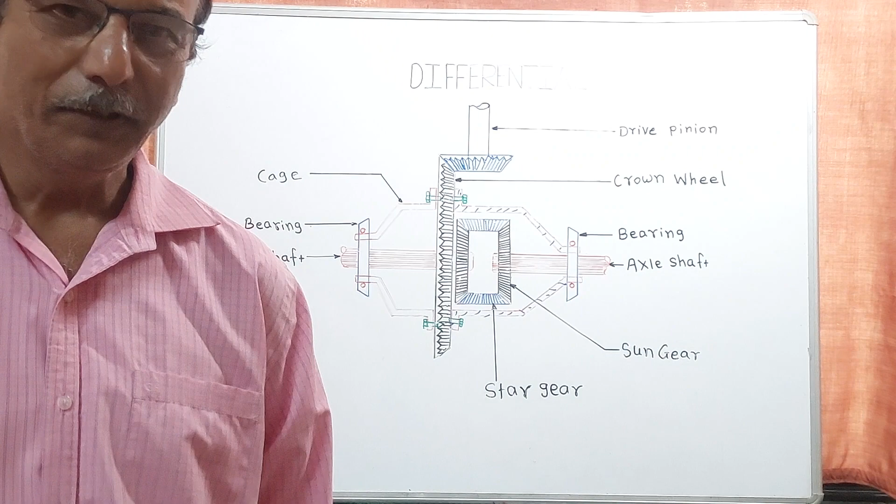So let us see, I have drawn the figure on the board. Name of the figure is the differential, that is our topic. This type of topic is used in automobile vehicles.

Why is it very important? If it is not there, then problem will occur at turning time. That's why there are two types of axles: one is the dead axle, the other is the live axle. Live axle is used in vehicles at the backside. Nowadays, majority in light vehicles, transaxle is fitted.

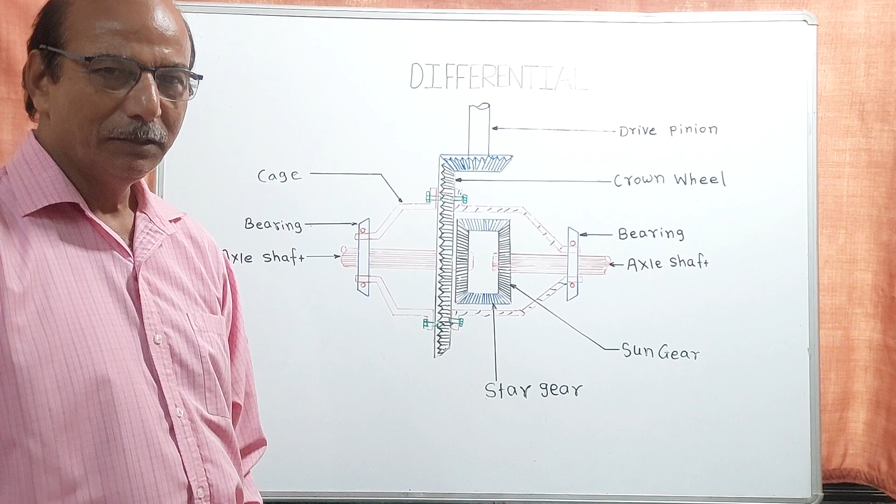So in light vehicles, transaxle is fitted. There is a clutch, gearbox, and differential, all included in one case, that is called a transaxle. These are fitted in light vehicles, as a front side unit. In heavy vehicles, nowadays maximum differential unit is fitted in the back side.

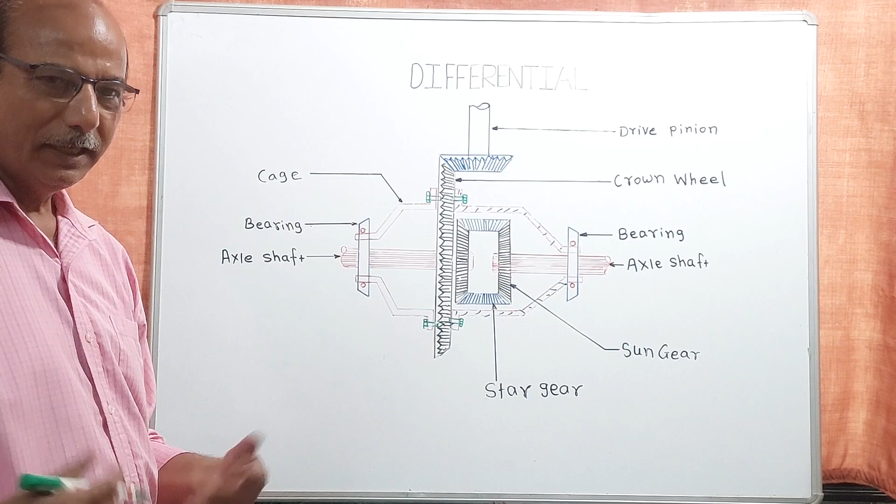So this is the location of the unit, as I have told you. Just by looking at this figure, we cannot understand this unit properly, so I will explain in detail. Just see here, both wheels are in the back side, this is the axle side, these are the tires and wheels. Between both wheels,

this differential unit is fitted inside the box. So why is it a requirement? Why is it necessary? That is the main fact, what is the use, what is the principle and function of the differential? That is the main thing.

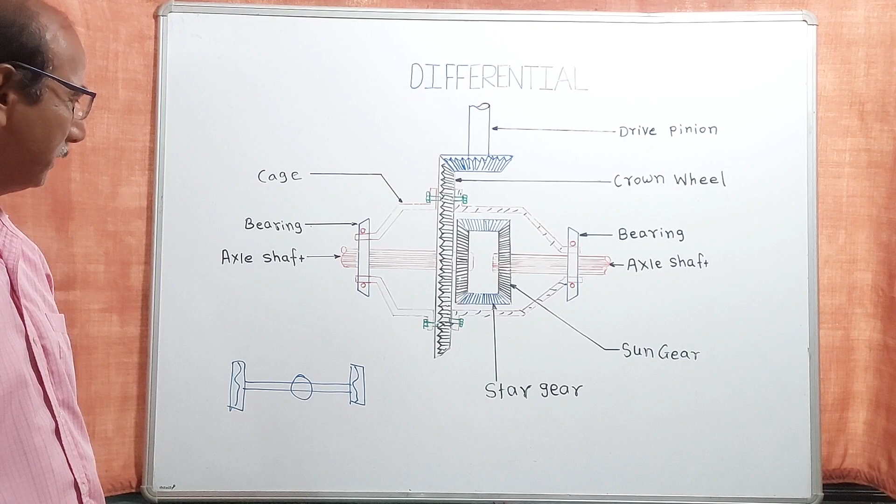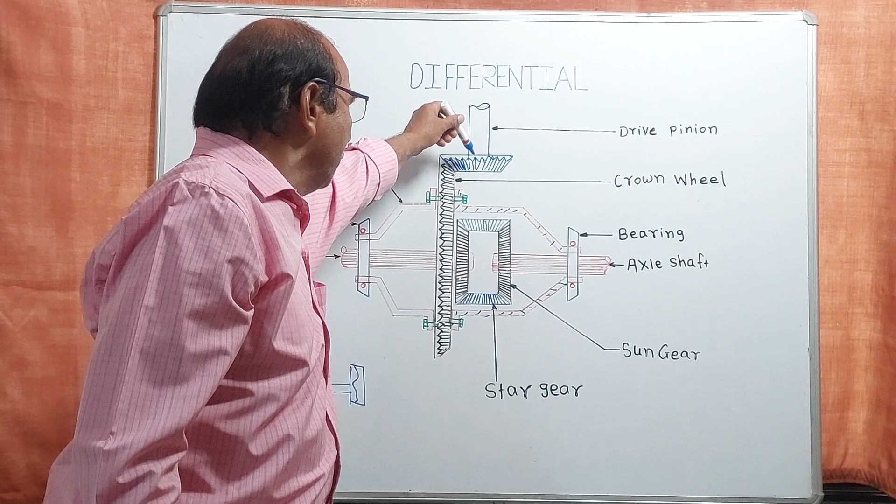Just see here properly. This is the propeller shaft, afterwards here gearbox, then clutch, and here engine. So engine gives drive to the clutch, clutch to gearbox, gearbox to propeller shaft, and propeller shaft to this unit. I have shown here the drive pinion. Drive pinion gets the drive and power from the engine. Then engine gives drive to the drive pinion, and drive pinion gives drive to the crown wheel. So crown wheel then rotates.

Just see the construction of the differential unit, then we'll see the working. Drive pinion gives drive to the crown wheel, and on the crown wheel this small cage is fitted. For what purpose? Cage is given here. Both sides of the crown wheel, this cage is fitted.

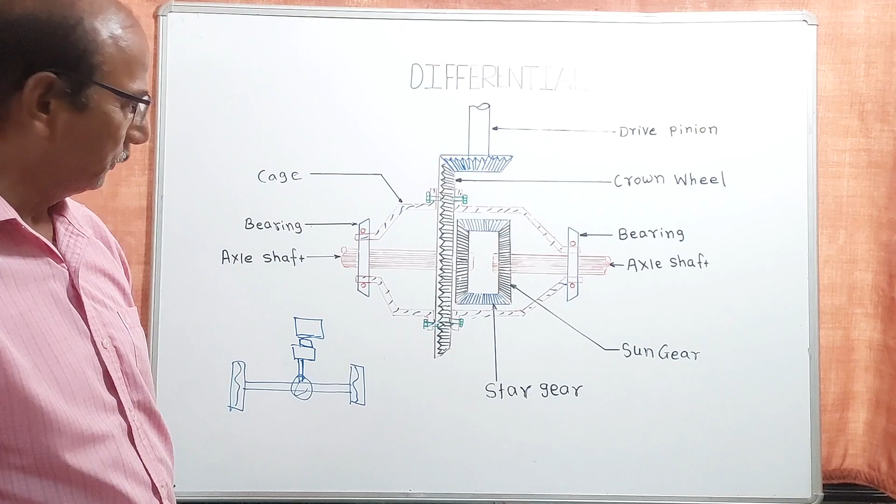Afterwards, what happens? In construction, this is the crown wheel, and both blue shown here, these are the star gears, we can also say planetary gears. And these black ones shown here, these are the sun gears. Sun gears are most important, as well as star gears also.

A small pin is given here, the axis pin. On the axis pin, star gears rotate. Maximum star gears are 2 or 4. 4 star gears are used in heavy vehicle differentials, but only 2 star gears are used in light vehicles maximum.

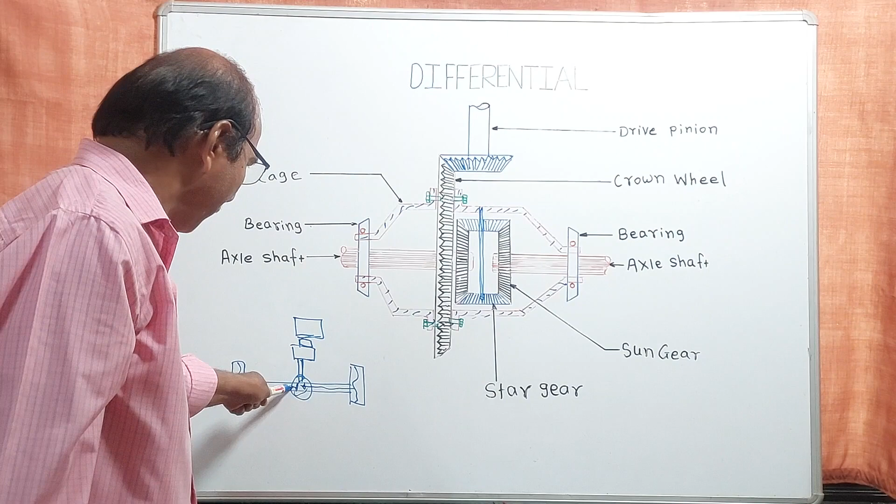So sun gears are fitted with the axle shaft. Sun gears are here and here, these are also sun gears, and axle shafts are here. Both sides, two axle shafts are here. Axle shafts are given there for giving rotation to the wheels. These are the wheels, and then

wheel rotates and then our vehicle moves, after getting the drive from the engine to the clutch, gearbox, propeller shaft and axle shaft. After getting the drive to the rear wheels, then our vehicle moves ahead. So how does it work? Then I'll explain now.

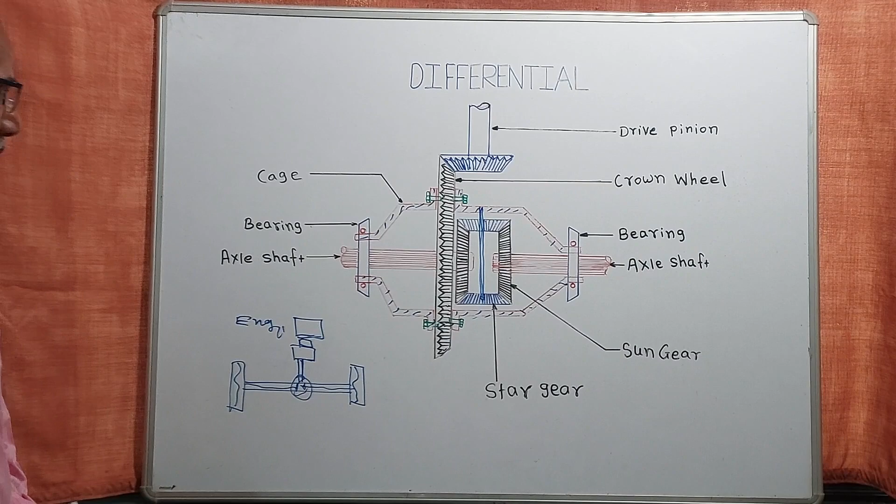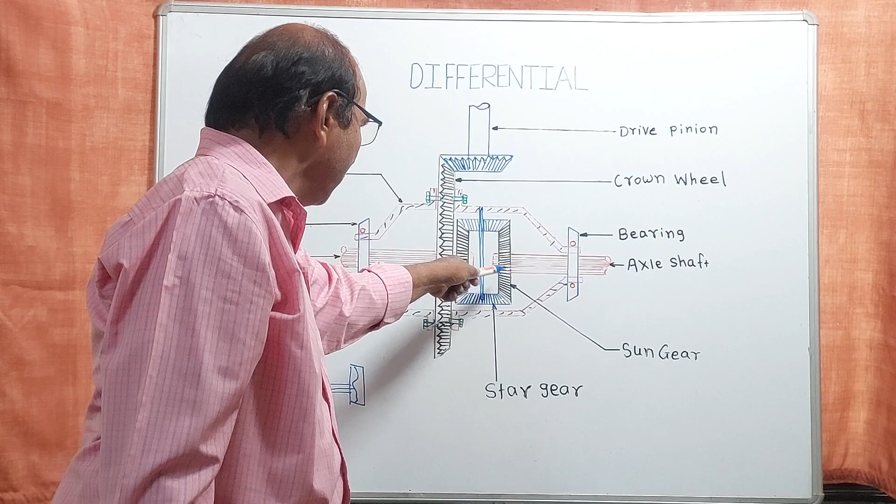So drive pinion gives drive to the crown wheel. On the crown wheel is fitted the cage or case. Inside the cage, all gears are fitted, star gear and sun gear. When our vehicle moves in a straight way, at that time star gears are not working, they're in an axis position. Only sun gear rotates, because sun gears are fitted with the axle shaft. Crown wheel gives drive to the axle shaft and then it moves straight.

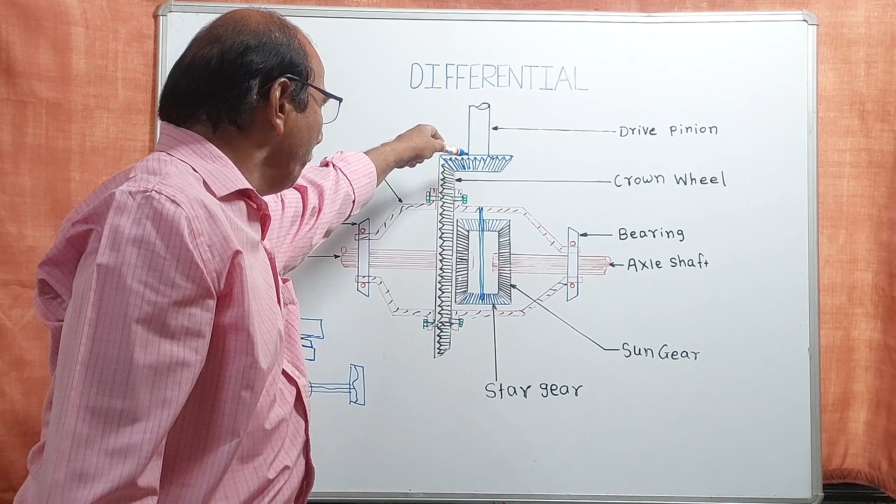That means when drive comes in the drive pinion and gives drive to the crown wheel, it is a right angle drive, that means 90 degrees, giving drive to both wheels. Drive comes straight and is distributed at 90 degrees to both wheels, during the straight way.

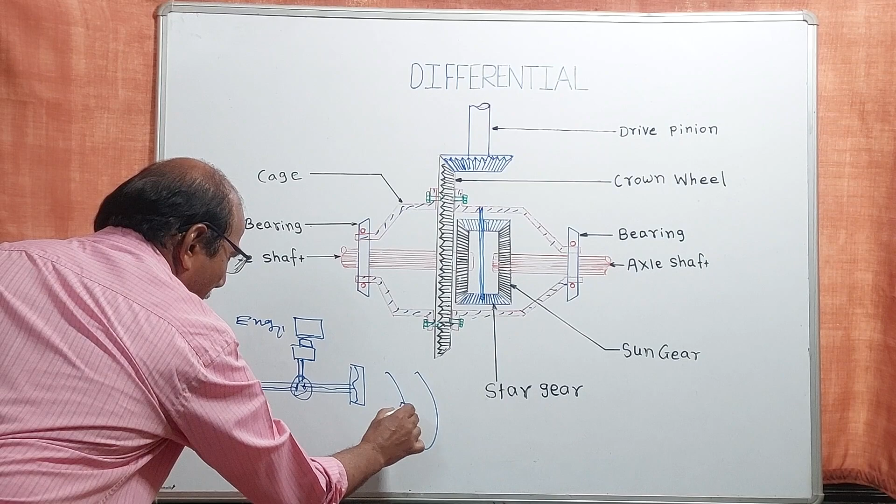As well, when vehicle takes a turn, left or right, that time the working of the differential is used properly. What happens? Drive pinion gives drive to the crown wheel. When vehicle turns to the left side, inner wheel rotates slower and outer wheel rotates faster. Load will come on the inner wheel and the outer wheel will be free movement. So at that time what happens?

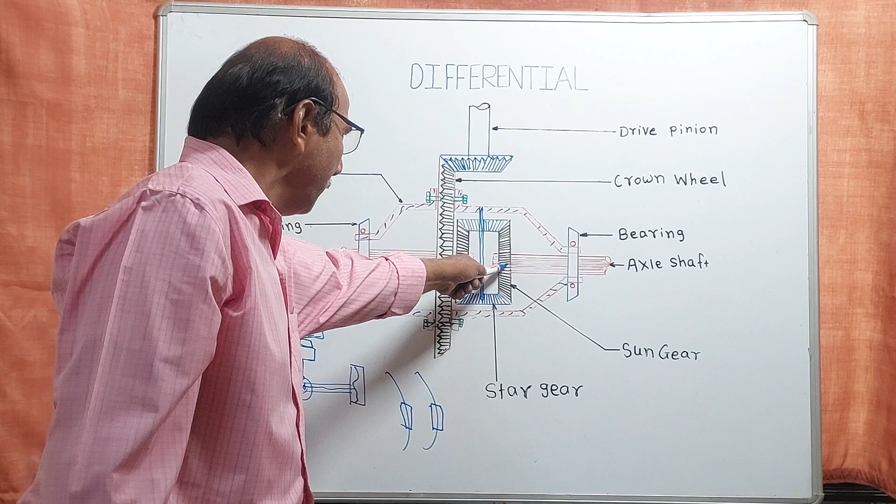Star gear then rotates on the outer side sun gear, and when taking a right turn, load will come here and the left side sun gear will rotate slowly. So this is the main function of the differential, because during turning time inner wheel rotates slowly and outer wheel rotates faster. For this purpose, sun gear and star gears are given in the differential.

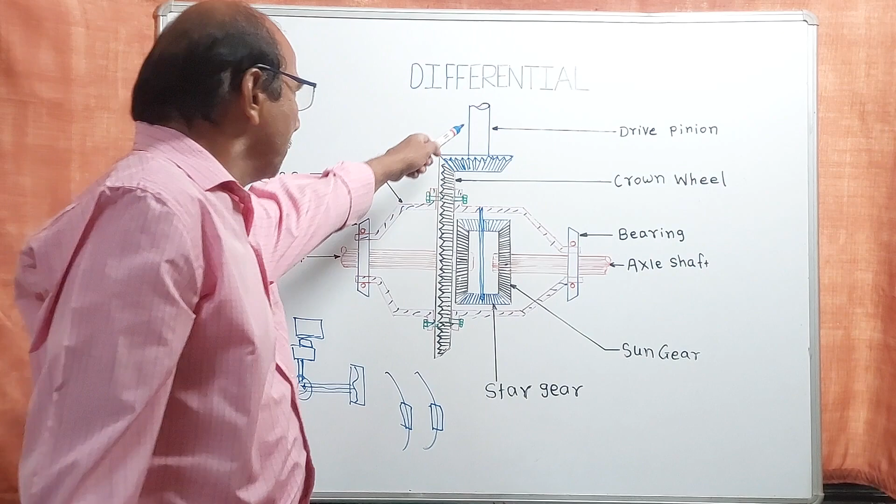Two functions. Next point: suppose drive pinion rotates 6 times, at that time crown wheel rotates 1 time. That means there is an increase in torque to both wheels, and that's why the vehicle can move easily.

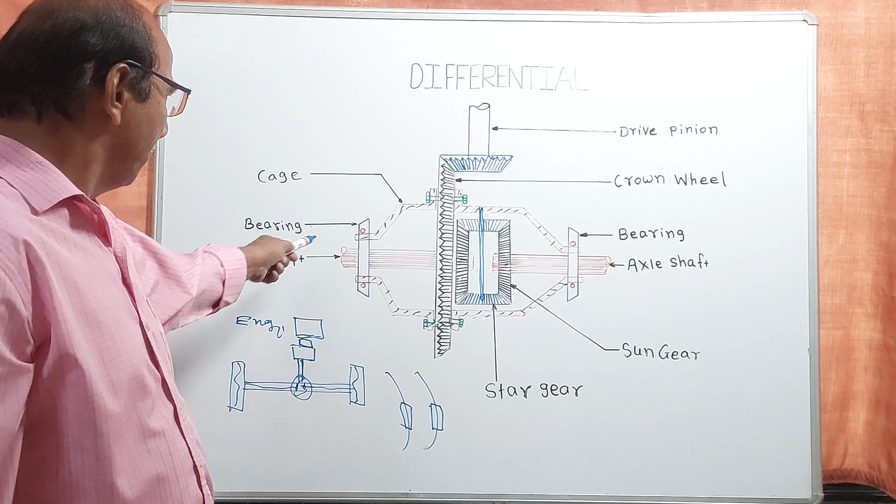These 2 to 3 functions are included in this unit, and that's why this unit is fitted in the engine side. This cage is fitted in bearings, majority and maximum, roller bearings are fitted for free movement, and for that purpose it should be rotated freely.

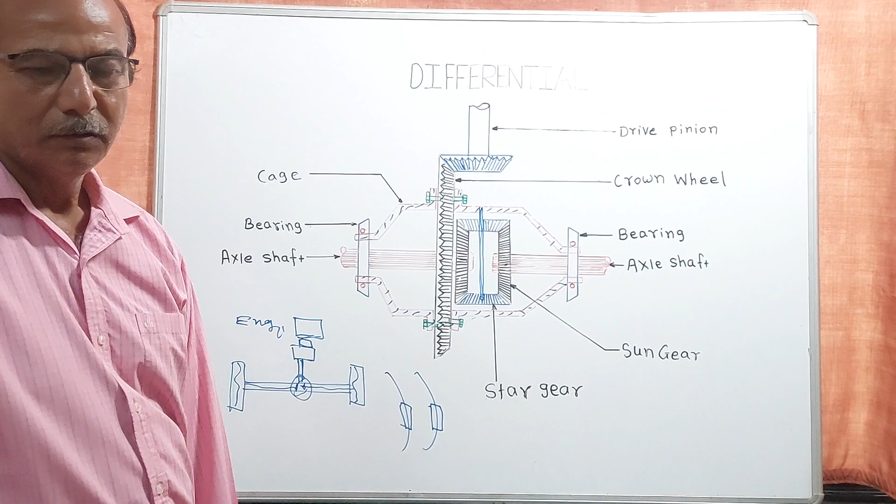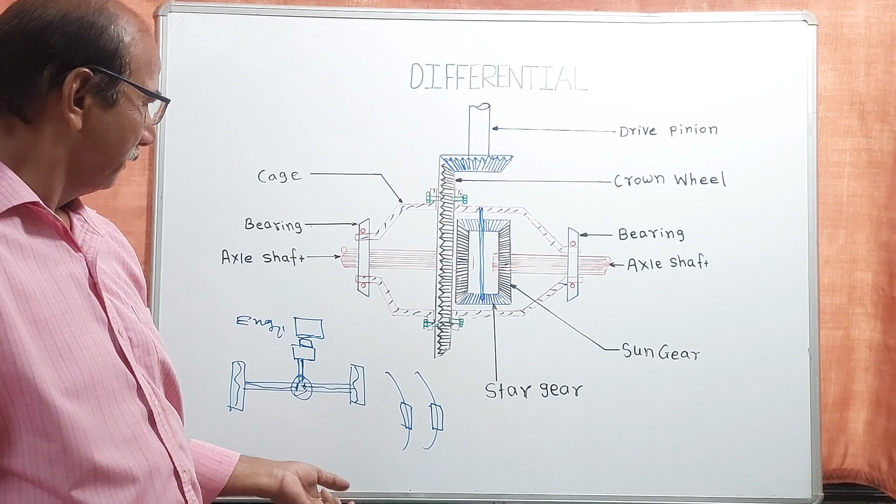That's why 90 oil is stored in the differential cage for reducing the sound, reducing the damages, and reducing the breakdowns. So this is how the differential works.